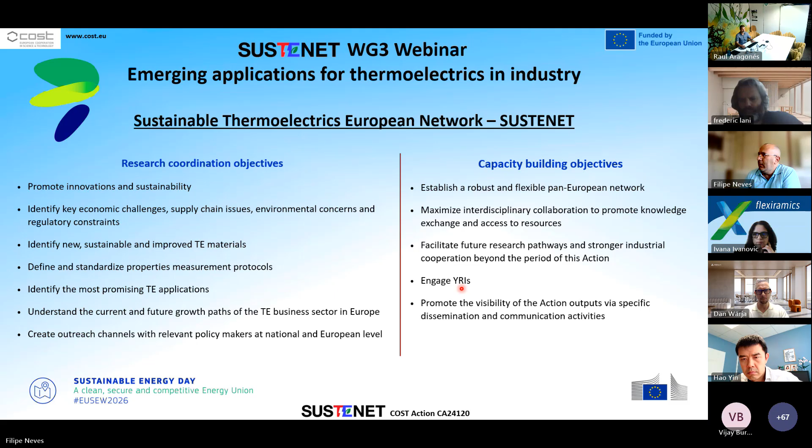So the SUSTENET action is organized in 4 working groups. One more dedicated to research of more sustainable thermoelectric materials, which is working group 1, titled Scaling Sustainability Through Artificial Intelligence. Then working group 2 is dedicated to application and use cases. Working group 3 to business development and supply chain. And finally we have a working group dedicated to dissemination, communication, and training activities.

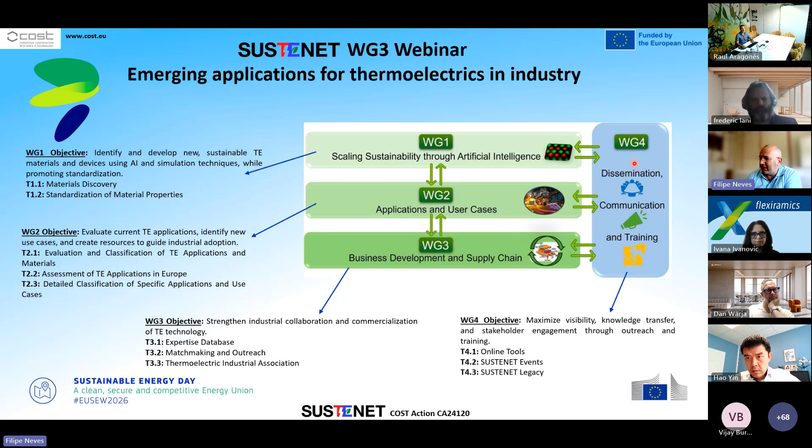So if you are interested to join, if you haven't done that yet, you can join by clicking through this link. You will have access to this web page, and then just click apply to join the working group that you seem most interested to work within. You can follow our activities on the website of SUSTENET and also through the LinkedIn page.

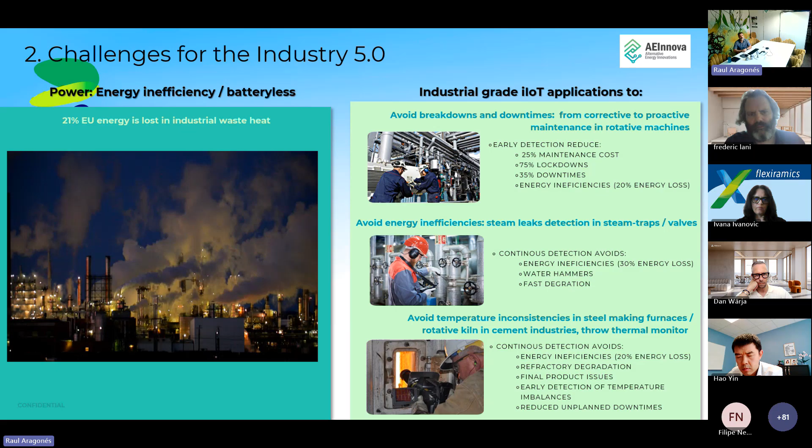When these companies look for industrial devices, on one hand they find those that are wired, with big challenges due to the cost of wiring. This only makes sense commonly in really critical assets.

But when they want to monitor non-critical assets like auxiliary pumps, mixers, ventilators, they commonly try to move to wireless devices because they need less investment in infrastructure for moving data around the plant. But they have a big bottleneck due to dependence on the lithium battery. Commonly, industrial sensors are powered by non-rechargeable lithium batteries. This is the main business of our competitors, because they want to keep you with recurrent expenses, recurrent OPEX, just replacing the battery every few years.

This is a very good business for them, but it's bad business for the environment, because every day they are moving to containers millions and millions of useless lithium batteries that have a very bad environmental impact from the harvesting of raw materials - lithium, from the lithium triangle.

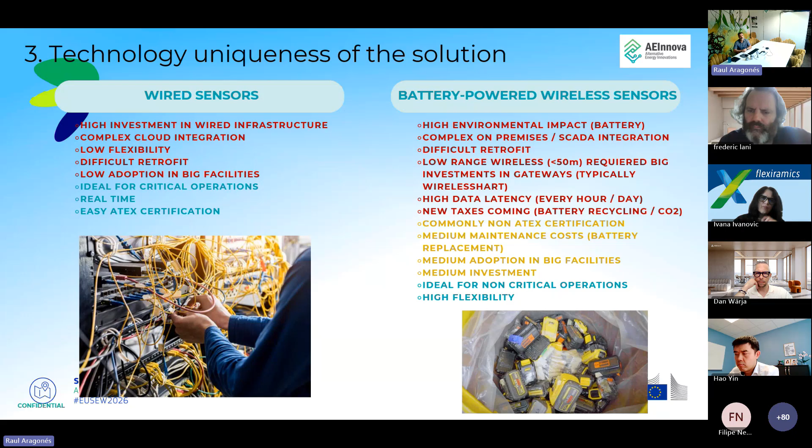So the solution is battery-less, taking benefit of the heat of the process. Easy, better integration, better long-lasting. Again, we have a continuous energy source, so you can send data very far. This, again, is a very important bottleneck from traditional wireless sensors.

Today, we have spoken with several customers commonly using wireless HART protocol that has only a few meters of communication distance, and they need to invest hundreds of thousands of euros to have a correct network of repeaters inside a big facility. Hundreds of repeaters that cost 2,000 to 3,000 euros each. Whereas with long-range wireless like LoRaWAN protocol, an open protocol, with just one gateway costing 1,000 euros, you could cover the full facility. So this is really a challenging innovation, thanks to using battery-less power sensors.

Also, they are more flexible. Lithium battery is explosive, so there is a lack of sensor portfolio because lithium is explosive, and commonly you cannot install this type of sensor in oil and gas refineries, chemical plants, or the food industry, since just the presence of dust can be explosive. You cannot use this in soybean manufacturing plants either. So these are big bottlenecks due to explosive areas.

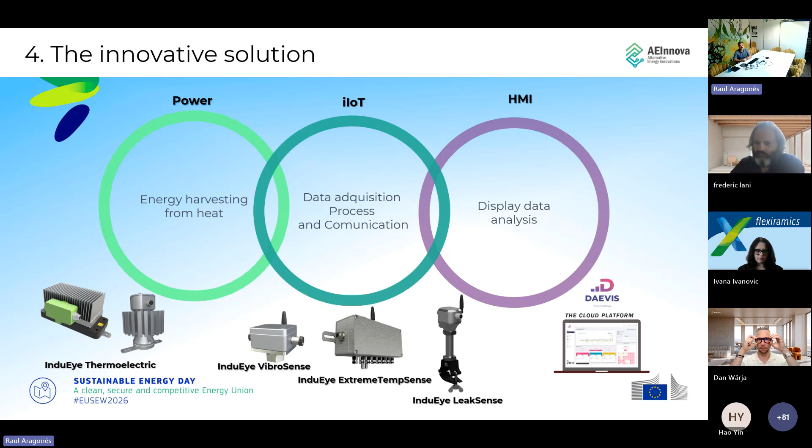Thermoelectric - so with just heat, we can generate clean energy that can be injected into my network of sensors, up to 300 degrees Celsius that this thermoelectric supports. The right one is the bigger unit that has more energy to power up to 3 sensors at the same time. The left one, the thermoelectric that can power just one sensor.

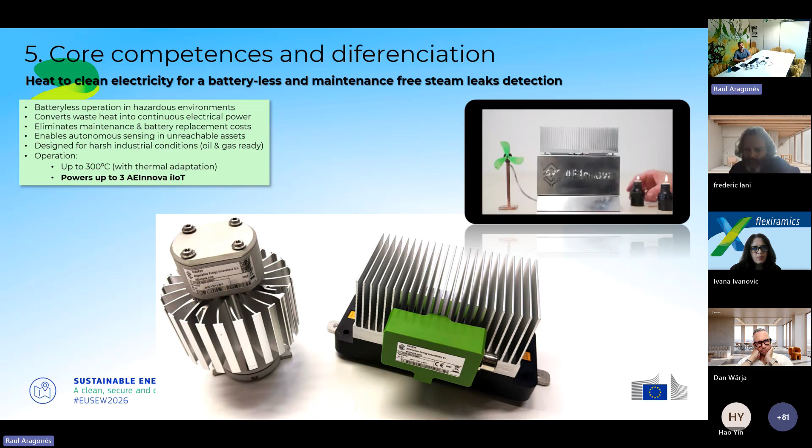And also these devices could power any third-party vibration sensors from our competitors. So, for example, IFM, Endress, Emerson - they could power their wireless sensors using our thermoelectrics.

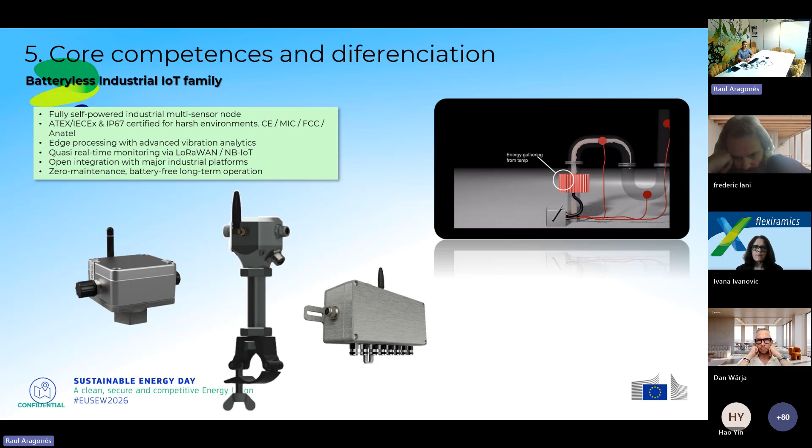Then the family of industrial IoT devices covers three main applications: vibration, leak detection, and high temperatures. Initially with LoRaWAN, a free long-range network communication protocol, but also narrowband IoT, a protocol that incorporates a SIM card and doesn't need any type of wireless infrastructure, just uses the 3G/4G network. So, 3 main applications.

This one is for vibration monitoring - one heat-powered unit that can generate energy for up to 3 vibration sensors, 3-axis vibration sensors, with 6 kilohertz of bandwidth to have a full diagnostic of potential machine malfunction - vibration failure that generates data from cavitation, lack of lubrication, unbalancing. So any type of potential malfunction can be detected.

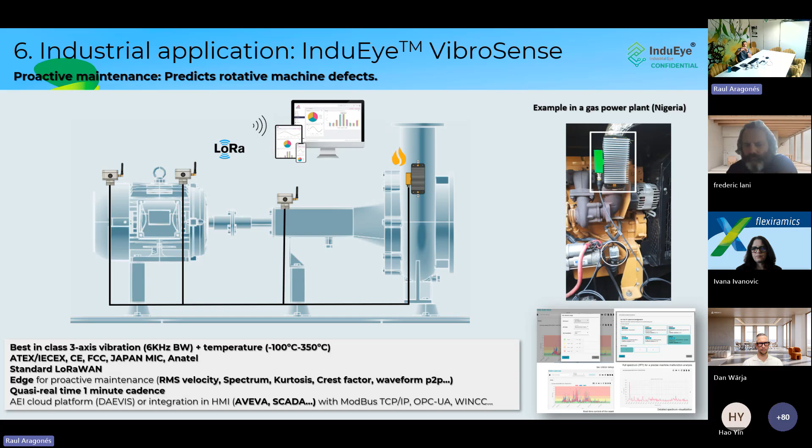On the right, a gas power plant area where we are monitoring vibrations in these engines, and below, what our customers see in our cloud platform, where they can identify the level of criticality - green, yellow, and red - to know the danger level of the machine. And on the right, you just apply the window of the spectrum, and you can identify where the energy is located, identifying the origin of the malfunction of this equipment.

Second, which is the main introduction of this webinar, is about steam leak detection.

It's a way of doing steam processes more energy efficient and letting companies save millions of euros per year in steam leakages, because a steam trap is a device that detects water condensate in the steam pipelines and evacuates this water condensate to the boiler. If this water travels around kilometers of pipeline, it can create water hammers that can make the steam pipeline explode.

This is why they need to evacuate this water condensate, and the equipment is called a steam trap. So this device set over the steam trap is able to detect, by temperature comparison in the inlet and outlet of the steam trap, but also by listening to the acoustics, the sound of the steam trap, what is happening inside the steam processes. This is the first generation, first tested in 2021, combining thermoelectrics plus IoT in the same device.

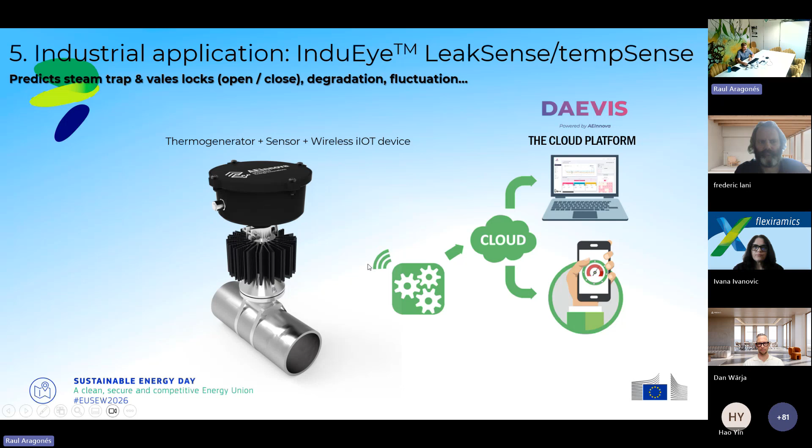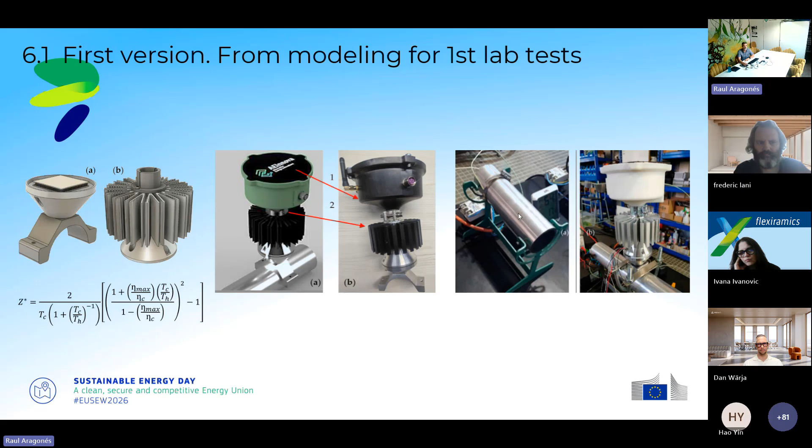First modeling to obtain the performance of this energy harvester, first modules, first tests in the laboratory, and first tests in our thermoelectric generator laboratory. Then testing in one oil refinery plant on the left, and on the right, in one big stakeholder in pharma.

This is the LoRaWAN gateway from our partner Kerling that has 2 kilometers of radius of communication and up to 10,000 sensors connected at the same time with just one gateway. And this is the equipment that monitors 2 temperatures, inlet and outlet, and also listens to the steam trap.

The same approach here. This is a buoy steam trap, and this is a thermodynamic steam trap. So inlet and outlet temperature, and this microphone, an ultrasonic microphone, that listens inside the steam trap.

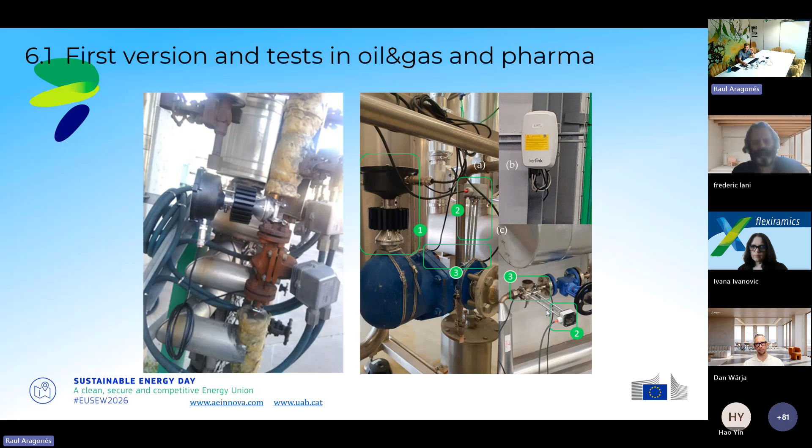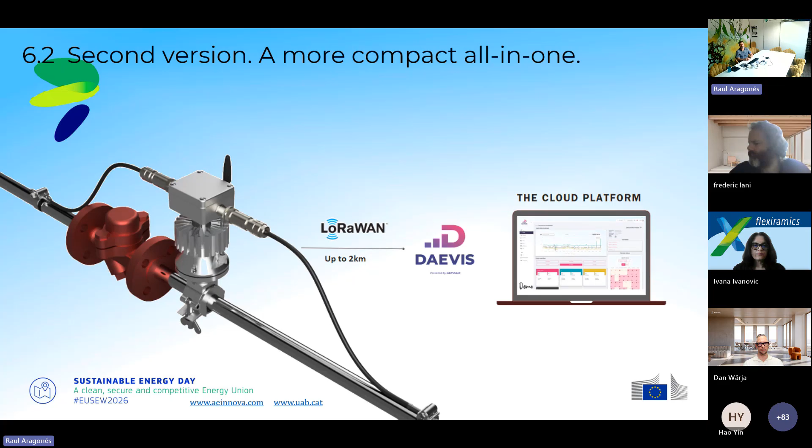And then the equipment evolved to a new generation that was more compact. Again, 2 temperatures and ultrasound. This was from 2022 to 2024. So a more compact device: we reduced more than 70% of the overall size of the thermoelectric, and also the overall size of the IoT device. Again, monitoring 2 temperatures, inlet and outlet, and ultrasound.

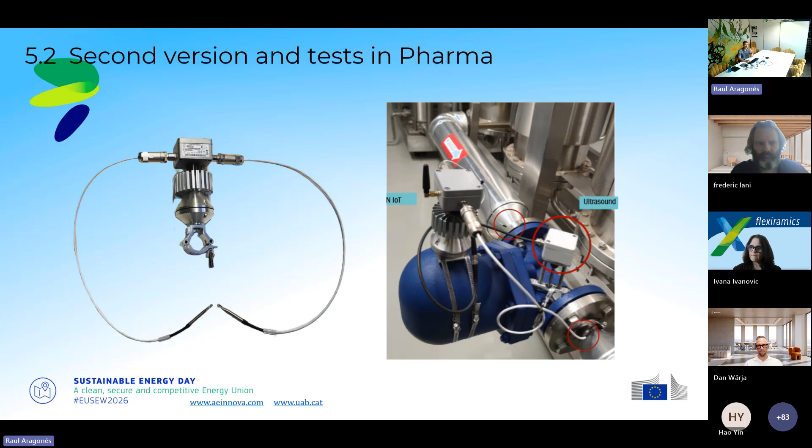This equipment was not really industrialized at scale, which is why we moved to the last version, which is commercial right now, and we have first projects running in Latin America, and also next month in the Middle East. So this is the equipment: thermoelectric on one side, because sometimes the energy source is not near the steam trap, and the ultrasonic and temperature detector, the steam leak detection, that you locate over the steam process.

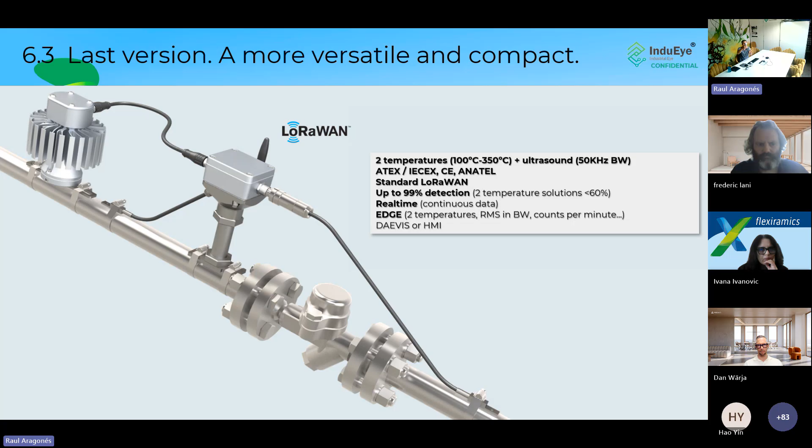And this is an example of one of our customers, in this case Petrobras in Brazil, the biggest Latin American oil company. We just set the thermoelectric in the steam pipeline. We set the system to detect, in this case, temperatures. This equipment is called TempSense.

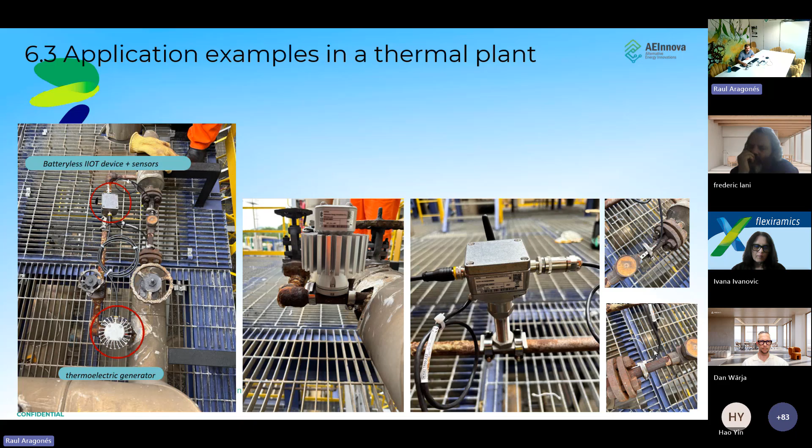We're launching next month the device LeakSense, which also incorporates ultrasound at the inlet and the outlet of the steam trap. We monitor temperatures and determine when the equipment is losing steam. But there's also a food industry application of the steam trap, where we're also testing and detecting ultrasounds plus temperatures.

This one is called Colacao, from Idilia Foods. It makes cocoa chocolate powder. So we detect temperatures and ultrasounds.

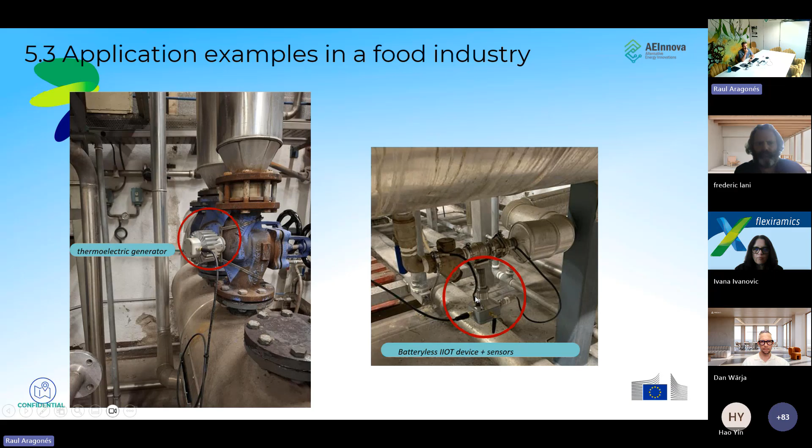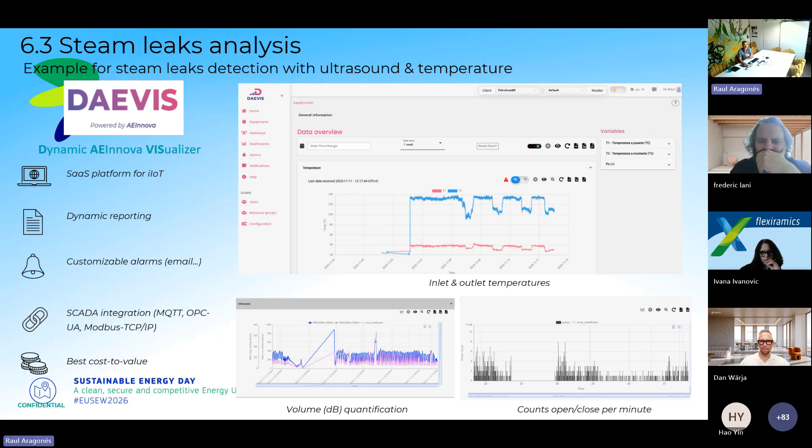These are validations done previously to installing at Petrobras. What our customer sees is inlet and outlet temperature that allow us to detect when we are accumulating steam water in the inner part of the steam trap. Also ultrasounds that detect the level of sound inside the steam trap and the counts per minute that the steam trap opens and closes, indicating that the device is working properly.

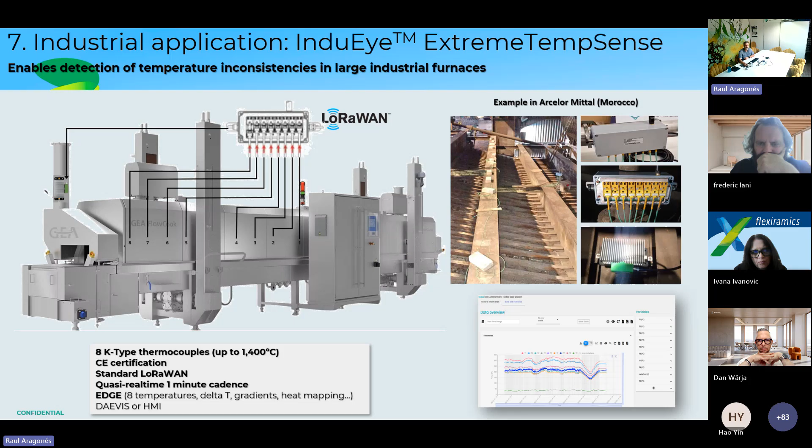Last but not least, an equipment to monitor temperatures in big furnaces to determine gradients in temperature. This is an example of one customer in Morocco, ArcelorMittal. We detect different gradients of temperature using this equipment, which has 8 thermocouples.

In general, we are addressing a big challenge across all industries: food, oil and gas, chemical, iron and steel, pharma, paper, cement and concrete, and petrochemical.

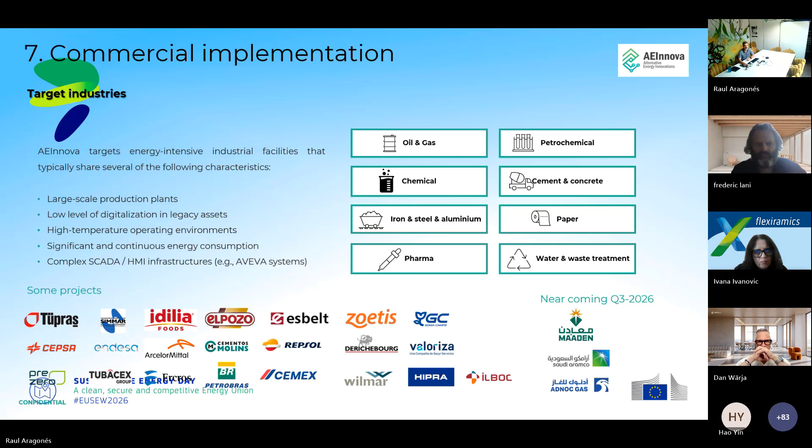We produce the devices up to 200 units per month here at AEInnova. We have all the machines to produce all the devices, and we also have a subcontractor here in Barcelona where we can produce up to 2,000 devices per month.

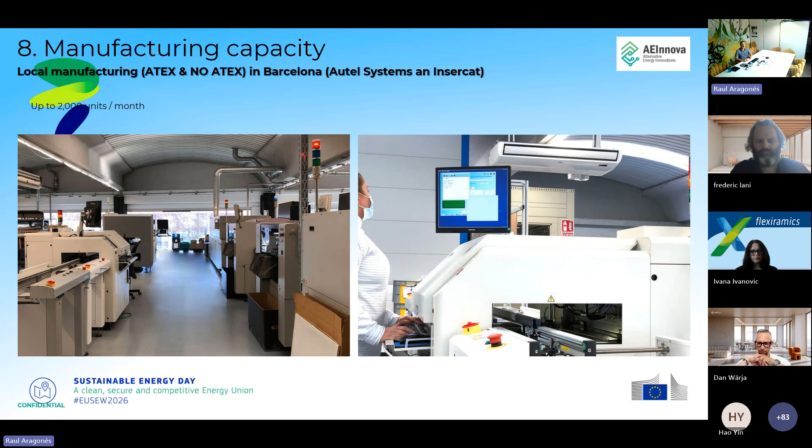So in general, we're ready to export to all the continents. This is technology where we have the know-how here in Europe, and from Europe to the world. We have several patents in Canada, the US, and Europe, the ATEX and IECEx certifications globally for explosion processes, and several compliances to sell technology in markets like Japan, Europe, America, and coming now Anatel in the next weeks for

Latin America, for Brazil. And this is my contact.

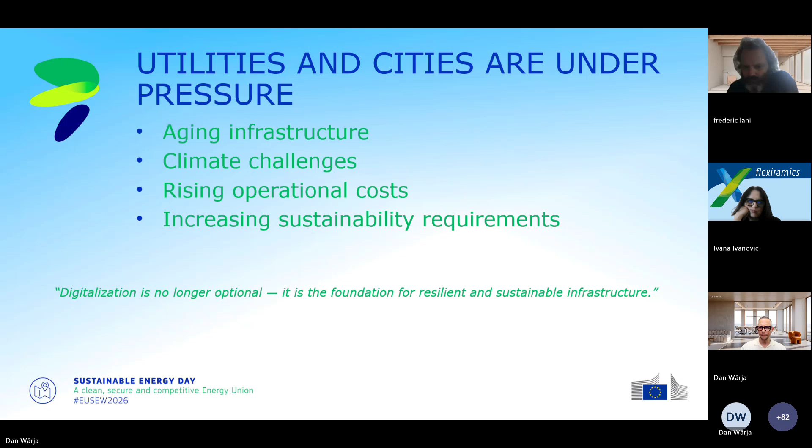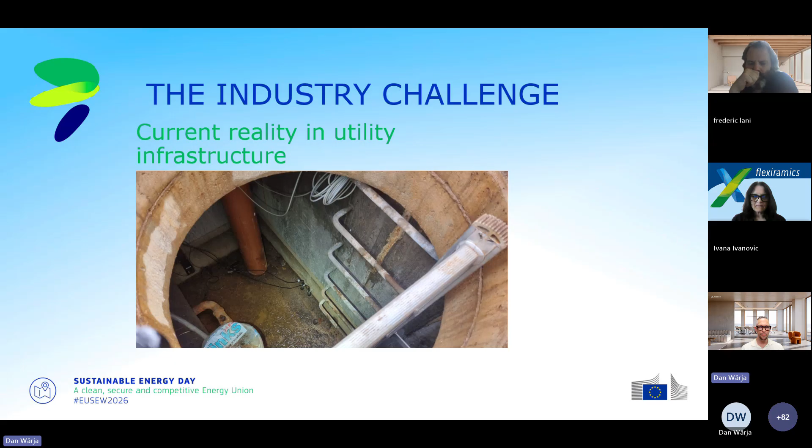What we have seen today is that there are about 700,000 of these manhole chambers still in use in Europe. 700,000. So just imagine if we don't take care of them, we have a big problem in the infrastructure.

This picture is a good example. It might look like a very nice, cool picture from a remote distance. This is actually boiling green district heating water where the pipe could burst in such a network, or in the manhole. It's still a nice picture from a distance, but don't be showering in that water, because that might be your last shower in your life.

The challenge again: we know that heavy rain will affect the system with flooding. There could be leakages, there are leakages in the system as well. And as mentioned before, working conditions must be secured, because you don't shower like that more than once. That's a simple fact. And of course, we would like to boil only the water that needs to be boiled, otherwise we simply waste energy resources. So let's keep the system as tight as possible.

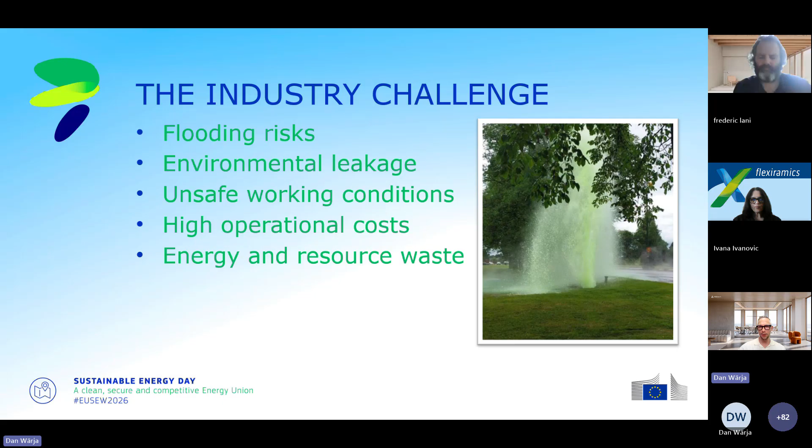On a bigger picture, we have this green transition, decarbonization, that we all speak about, and that simply requires better operational intelligence. We need to know what is underneath our feet. Sustainability is the key - we need to know what is underneath our feet to achieve the best sustainability.

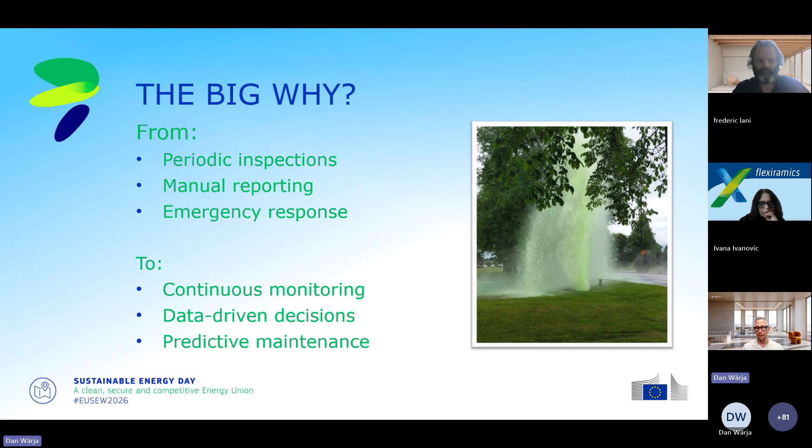So the big why - how do operators work today? It's a lot of reactive maintenance. Once you see something leaking, you solve it, of course. The customers, the utilities, try to be one step ahead, so they do a lot of manual inspections, if they ever have the time for it. But in general, there's a lot of reactive maintenance. That's the situation we would like to change - we all need to reach a level of continuous monitoring, and be ahead of disasters with predictive maintenance. All that is based on data-driven decisions, so we need to get data from the system.

This is now where we actually step by step get closer to the Thermoelectric technology.

It's not about keeping these chambers forever, but utilities need some sort of information on what they should prioritize - what chamber should be removed next, over the next year. And this isn't done in a day, a year, or even a decade - this will take decades to fix.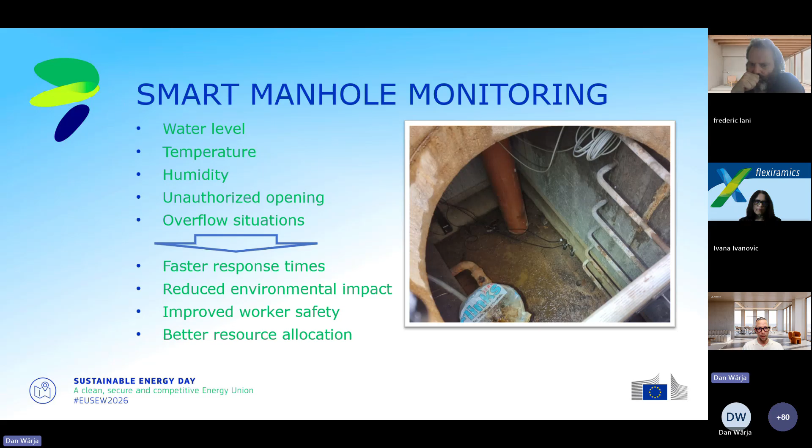So by having this fast response time, by having an industrial IoT device inside the chamber, we can first of all increase worker safety. We will use our resources in a great way, and in the end, create a better environment. Simple as that.

So thank you, Hao, from technology and your team, for helping us with this energy harvester that we call the WEHM1. It's an energy harvester utilizing the delta T, in our case of 30 degrees - that's what we say should be the minimum. We can go lower than that, but with a 30 degree delta T, as Raul presented in his earlier presentation, we can have sensors installed out there. In our case we installed them in manholes, and these sensors communicate by 4G or NB-IoT. We have real-time communication, we get the data to the cloud, we can have clever, great alarm management, and we can also see trend analysis. By having the trend in our hands in the data, we can make clever decisions.

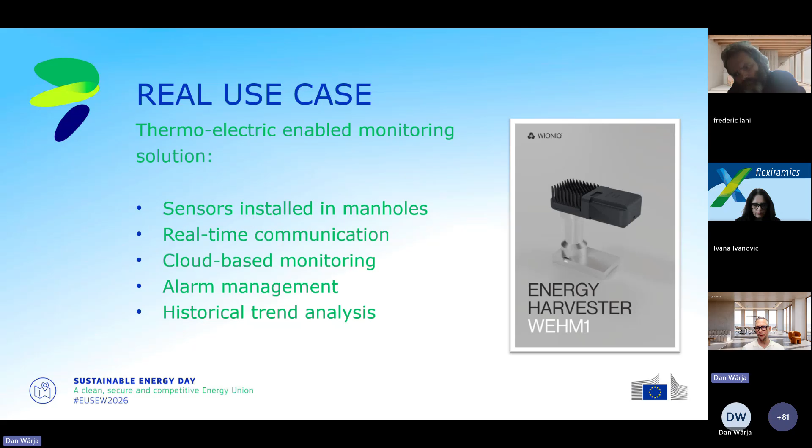Some very fresh examples, one from Austria, one from Sweden. It typically looks like this - we have pipes that aren't that corroded in the end, but we have the harvester installed on the hot surface, what we call the flow pipe. We secure that we have 30 degrees from the flow pipe - normally you have 95, even more degrees on the flow pipe. The chamber typically has about 25 degrees, so we always have a good delta T of minimum 30 degrees. That will serve our sensor, in this case, this manhole application, where we add all the sensors that can support us with level, temperature, moisture, etc.

So in the end, we have three main benefits. Operationally, we will reduce emergency callouts, and be ahead of the disaster. It will help the utility and the customer prioritize which chamber is the most affected one, what should be prioritized for the next year. Maintenance planning, of course, is the final output of that.

Environmentally, we are the leak busters in this industry. By pinpointing where we have the leak in the chamber, we can catch it at an early stage. You don't need to manually inspect these chambers, running around or traveling with a car, opening lid by lid to see dry or wet. Well, we need to do something about that.

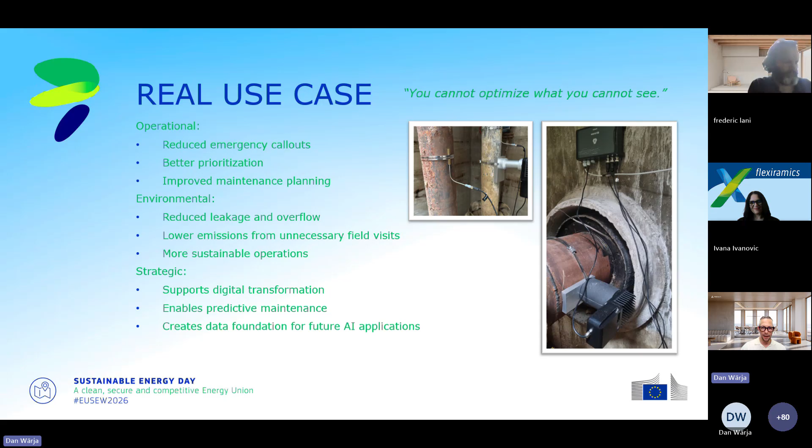And that's the strategic final point as well: predictive maintenance. So collect data for clever decisions, and we can promote this digital transformation to get real digital twins in the smart cities. You cannot optimize what you cannot see. So we are actually the eyes down there underneath your feet, the lid that you can find in the street.

Business case, as Hao mentioned as well, this is a kind of free of charge energy that we see. It's the waste heat. Instead of using lithium-ion batteries - first of all, they're classified as dangerous goods. It's dangerous, so just the transport nowadays is not free at all to transport lithium-ion batteries. That's one cost you need to remember.

The manholes are typically positioned in the street. If you should open a lid, you need to stop the traffic. It's a big effect on society. Security-wise, you should have 2 people, and they have for sure some sort of hourly cost - of course different all over Europe, but there is a cost, and you can easily plan 2 hours of breakdown. Since it's a dangerous area, you need some sort of emergency evacuation tools or safety equipment, simply spoken.

Batteries don't last forever. In our case, typically 3 to 5 years, and then you have to dispose of them somewhere, so the environmental impact is there. Just seeing a typical usage of 10 years, up to 3 cycles of this step-by-step is a must - you install them, you replace them the first time, you replace them the second time. So just imagine that all these costs together are far higher than the cost of installing the harvester.

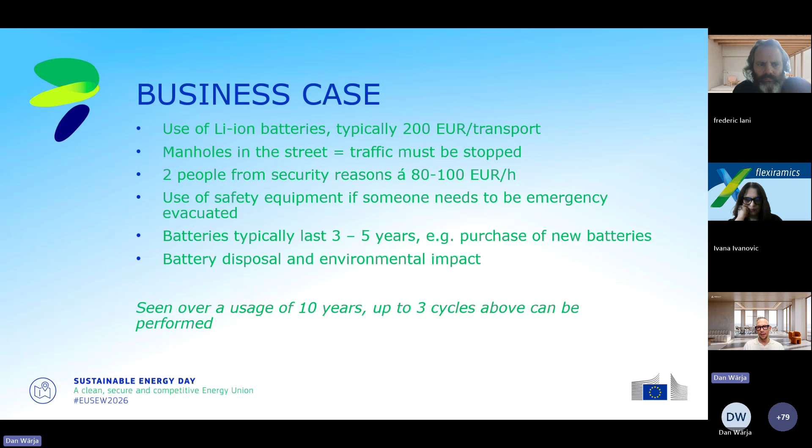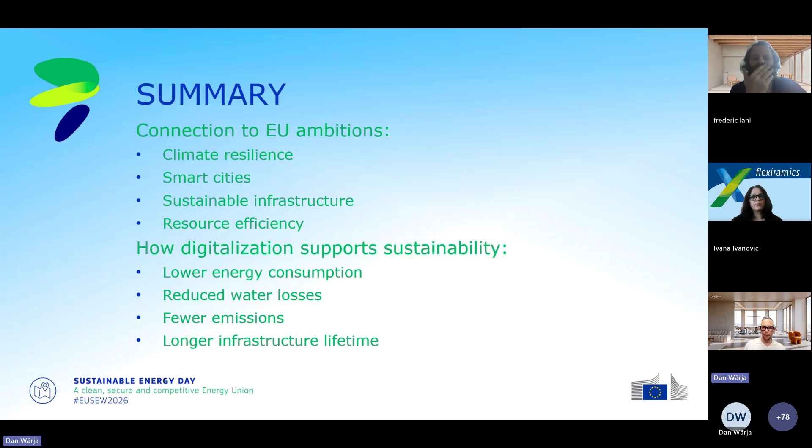Focus on what is important, that's the part. So a final quote from Wionic and me, Dan Wärja: the green transition is not only about producing energy differently, it's about operating infrastructure smarter. So thank you everyone for listening to my contribution, and we are open to collect all the questions in the seminar by the end. Thank you very much.

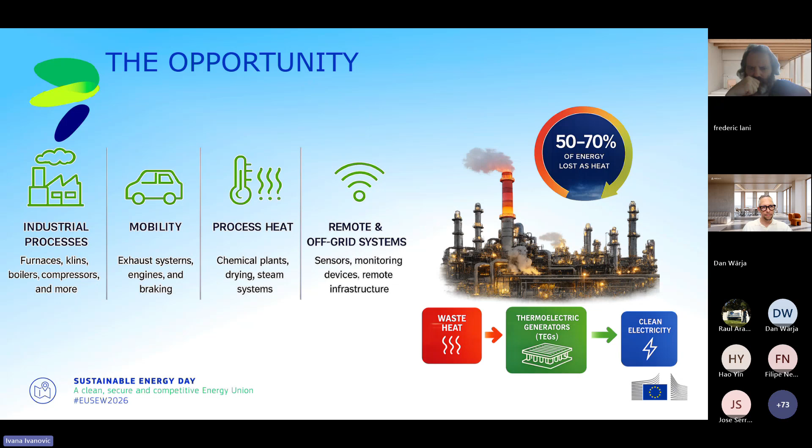So, should we move? Previous participants explained how much of the energy today is processed but also lost as heat, no matter the different industries mentioned here, and the pressure they are under to recover at least part of that waste heat, where thermoelectric generators come into place as an option to convert part of this wasted energy into electricity. For that, they should be reliable. I'll use some of the schematics, so hopefully, at least as a scheme, it is correct.

The TEGs operate under extreme conditions - steep temperature gradients, chemical exposure - and there is a problem of reduced efficiency and reliability, especially with the material interfaces as they degrade over time. So this is often, very often, the limiting cause of material interface degradation.

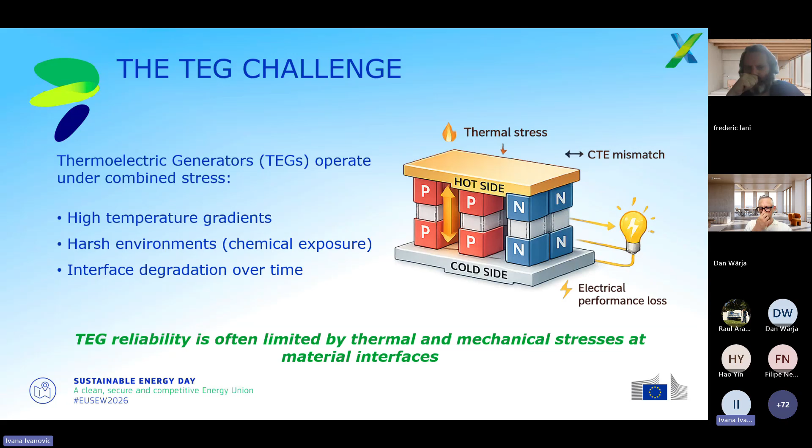What do we do? Flexiramics makes pure ceramic microfiber non-woven material. I also have a short film to show how it looks. Basically, it looks like a Kleenex tissue paper, but made of ceramics. So it has ceramic performance, but also polymer-like flexibility, and that is something unique. Of course, as ceramics, it has high temperature stability, and it's still lightweighted, so it's easy to process.

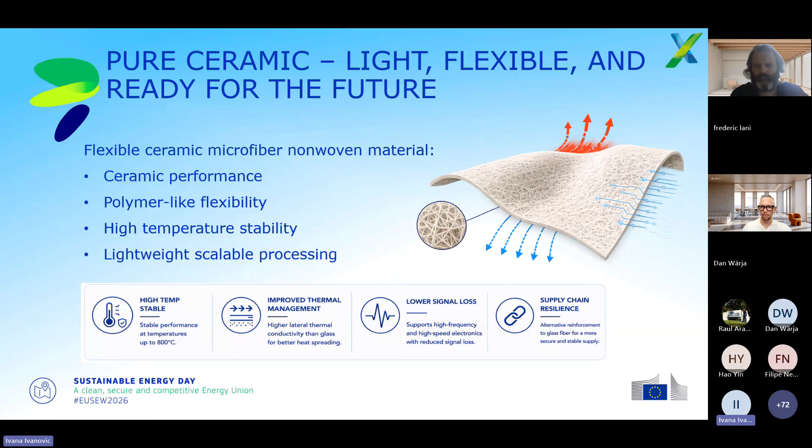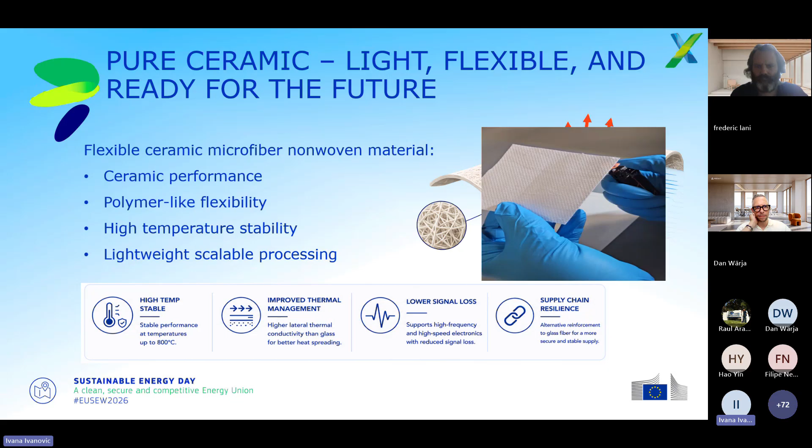This combination makes it interesting for different applications, one of which is new architectures in thermoelectric generators. I think this is simple, how it looks. So this is ceramics - it doesn't burn, it's flexible, it's very thin and lightweighted. That is what we make.

If you think about the technology, it's a sol-gel, the proprietary technology we have. It goes through different temperature gradients and then comes out as a continuous non-woven fiber from the oven. This product is then further treated or converted into composites, coatings, impregnated structures that give versatile options for applications.

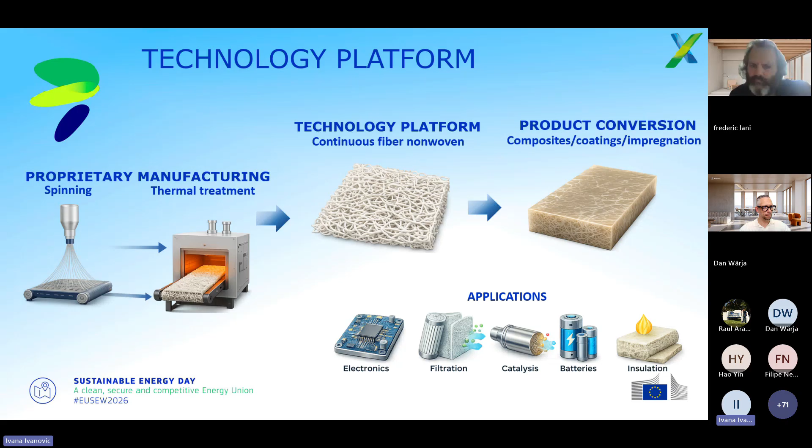And when we talk about electronics, energy, you see applications in electronics, catalysis, batteries, also in insulation, electrical, and even such as material in filtration.

So what makes our material powerful or interesting, talking about new or advanced materials, is that one material platform actually addresses multiple engineering challenges. We can talk about lower thermal expansion, which gives dimensional stability, so the CTE is close to copper. We can talk about faster heat dissipation, especially in the lateral XY direction compared to the commonly used glass cloth - it has 4 times better thermal conductivity.

It shows 70% less signal loss when used compared to the mentioned glass cloth, in 6G or other systems. Last but not least, it has more efficient energy recovery or waste heat recovery. So that is where we find a place also in the new architectures of thermoelectric generators.

Oops, sorry, wrong button. I wanted to move the slide, so I pressed stop sharing. So, back on.

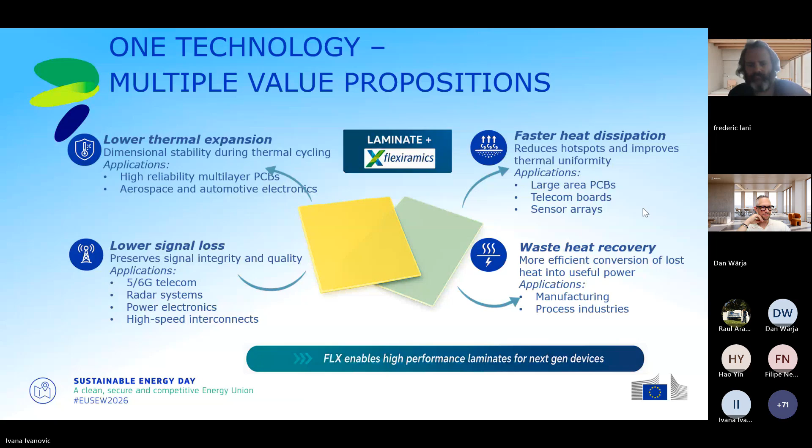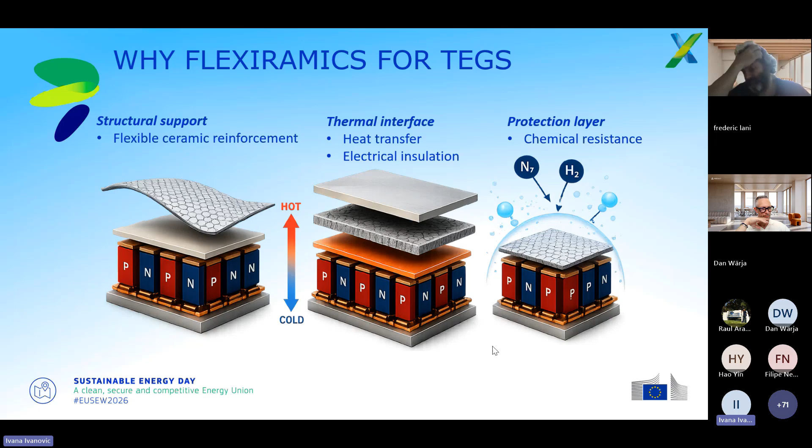So why our material, Flexiramics material, for thermoelectric generators? It has multiple functions. It can be used as a reinforcement layer. It does provide structural support. It improves the thermal interface and offers electrical insulation. Last but not least, it can be used with different protective layers for chemical resistance.

The value proposition, when we talk about flexible ceramics that Flexiramics makes for thermoelectric generators, would be in CTE matching, which provides better reliability. It has, when in a composite as we make it for this application, a slightly conformable interface contact, which reduces the contact resistance. And coming to the lightweighted aspect, it is very thin - 60 micron, 80 micron - so it's not compromising, it still has structural integrity, but offers better design freedom or lightweighted options.

So that is exactly like the small TEG prototype that Hao was holding at the start. That is the base, or reinforced film, which can potentially be integrated into TEG.

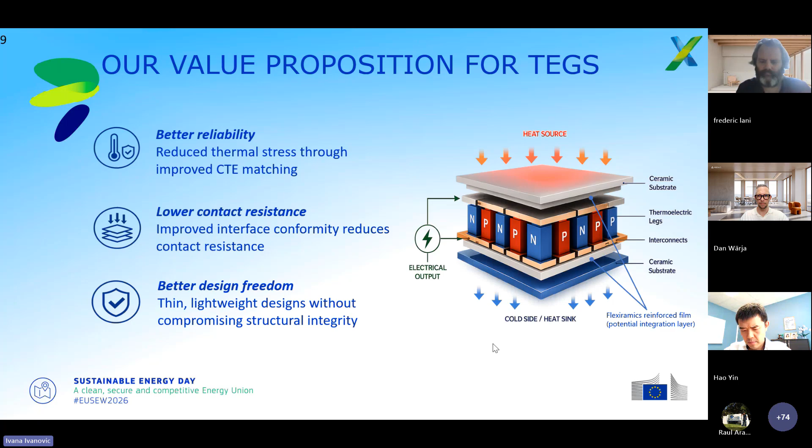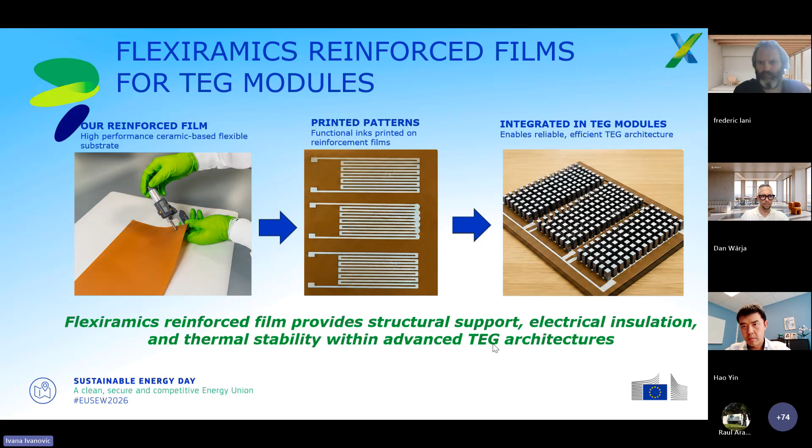And just shortly about part of the sustainability - as already mentioned, more efficient conversion of heat, longer lasting materials because durability, efficiency and reliability will be longer. It has lightweighted use, so also low material use, and shows or gives potential for reuse and different making of the materials that are currently used.

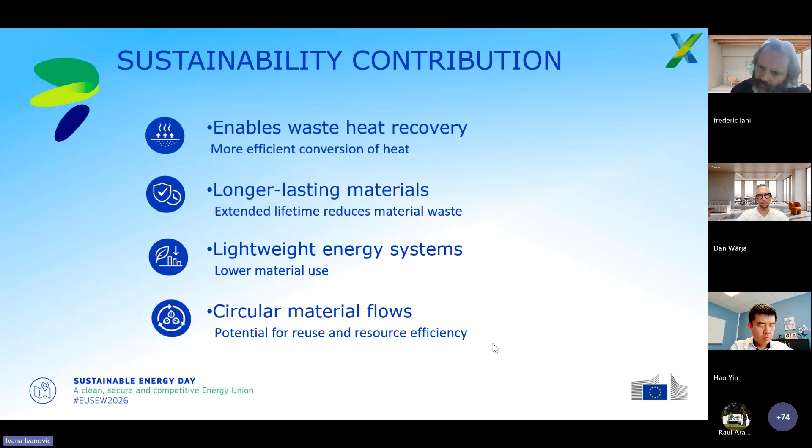What we do with the cluster - we're very excited to be part of the cluster and that regional ecosystem that focuses on sustainable innovation. What we can offer is advanced materials, strong material science and scalability. We also have pilot scale capability here in the Netherlands, where we manufacture the material, and we welcome collaboration with partners on material integration, testing or prototyping.

So with that, I just wanted to thank you for your attention, and if you would like to explore any projects or technical discussions or questions, you can freely contact us through the info shown on the screen. So thank you very much.

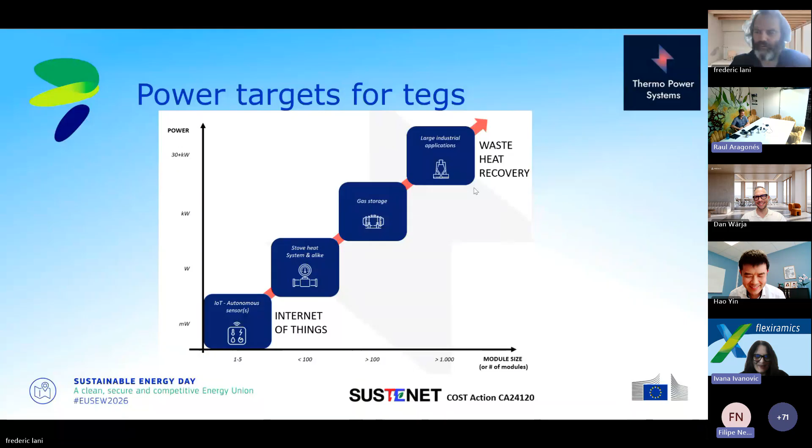I think we missed Frederic. Let me see if he can join again. This is a problem with the laptop not being batteryless - it depends on the battery. Let me wait a couple of minutes, there's a problem with the connection.

Probably we can move to some of the questions that are already in the chat. Yes, we could - if you'd like to ask any questions to the first speakers, you could write in the chat. There's one from Johannes. I don't know if you want to...

How high is the thermal conductivity of the flexible ceramics? That's probably for me. We speak about XY, so lateral, and then in PI, polymer, compared to the conventional glass used, it's 4 times higher, so 2 to 2.2 watt meter Kelvin. We don't compare the Z direction - I saw the table in the chat, but I'm not sure if it's X, Y, or Z. We talk here about the lateral direction, which improves heat dissipation and hotspots, and that's 4 times higher than glass - I said 2 to 2.2.

Thanks, Ivana. I just want to supplement - it's not only the thermal conductivity, it's also thickness, which plays a very important role. Correct, and it's flexible - most importantly, it's flexible. We love flexibility.

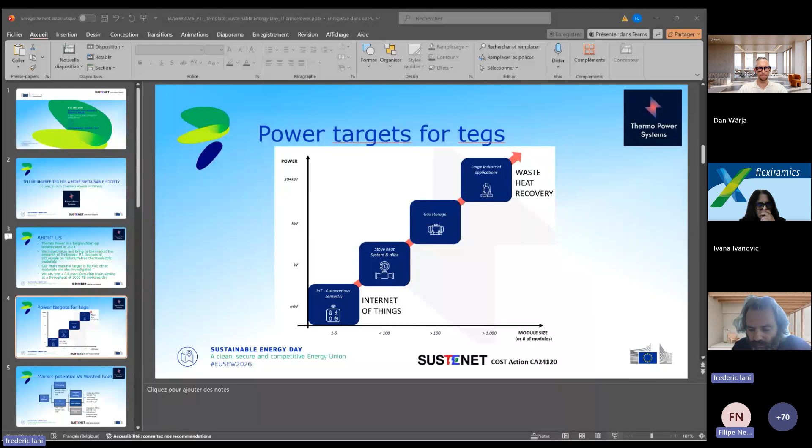Sorry Frederic, the slides are not moving. No, do you see it now? I just went out of it. Yes, let me continue like this. So you saw the slide on the market when I said market share. Maybe not. No, doesn't matter.

So why iron, vanadium, aluminum? First, these are very abundant metals, but also vanadium can be available as a pure metal, though usually we buy it pre-alloyed with iron because it's available as an intrant in iron metallurgy. So in Europe, vanadium is also readily available when pre-alloyed with iron. We have no problem sourcing the materials - it's a reliable supply chain. As we said earlier, if you take tellurium, that's a problem - it's manufactured mainly in China, maybe also in other countries, but it's a limited quantity and a vulnerable supply chain. This material can also be processed through conventional and powder metallurgy.

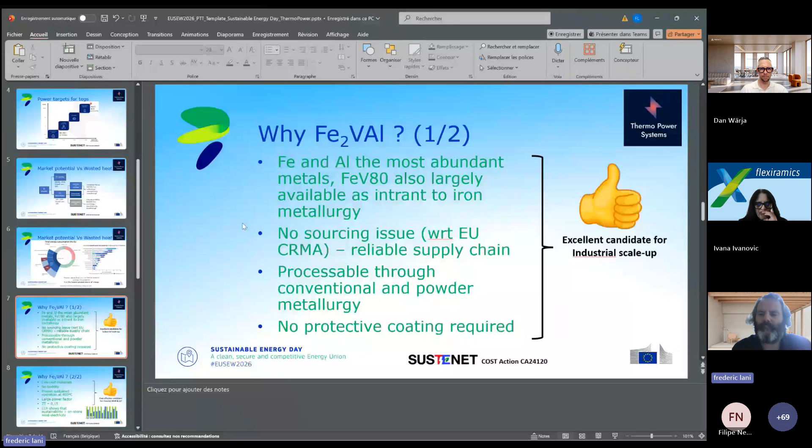If you think about thermoelectric modules, this material naturally passivates, so it's naturally protected against corrosion and oxidation. Also, we don't need protective barriers against diffusion when we assemble it. This is another advantage - an excellent candidate for industrial scale-up. That's one of our main advantages of the material.

Now, of course, what goes along with this is it's a low-cost material. It's much cheaper - let's say 50 to 100 times cheaper.

It has no toxicity when we have... do you still hear me? Yes, okay, because I hear some strange noise from Teams, like if I lost you.

It can be operated up to 400 degrees C. It has a large power factor, actually very competitive. Its major drawback, I would say, is that the efficiency itself, often measured in terms of ZT for thermoelectric materials, is 0.15. So it's a low efficiency, which means we will have a low conversion efficiency.

But another advantage is that we have performed life cycle analysis of this material for certain applications, and we could show that it's actually very competitive and has a big advantage. It's very positive in terms of the different indicators of the life cycle analysis against renewable sources of energy like wind electricity, and the same against photovoltaic panels. So this thermoelectric-based electricity will be cheap and very interesting and sustainable compared with other renewable energy sources.

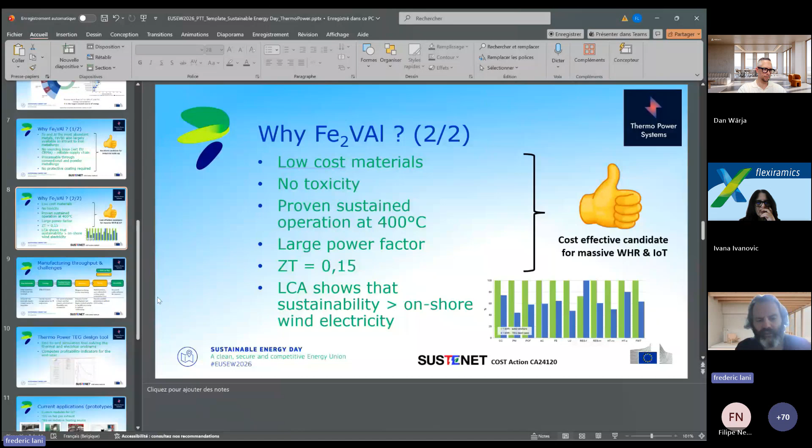So where are we, what are we doing now at ThermoPower? We started with the material, we improved the performance of the material up to ZT 0.15. And as I said, one of the main challenges is to be able to manufacture it up to 1,000 modules per day.

So what I'm going to show here is basically the manufacturing chain, and I'm going to say what are the main advantages and the challenges - advantages against challenges. You see here there's a color code. When it's green, it means we already achieved more than 1,000 modules per day - the throughput we're observing is above 1,000 modules per day. When it's orange, it means we are between 100 and 1,000 modules per day, so we still have challenges.

So now if we start from raw materials, what is particular to our approach is the fact that we have to work with large quantities of industrial raw materials. If you look at research articles, or academic researchers, usually the quantities are very low and the modules are prepared from pure materials. We work from raw materials, meaning you have impurities and we have to compensate for that.

Then if we go to casting, we have revamped a vacuum induction melting oven which allows us to manufacture 20 kilograms of material per batch, which is a very good quantity regarding our objectives of throughput. But the point is that casting requires very accurate compensation, for instance, for evaporation of aluminum.

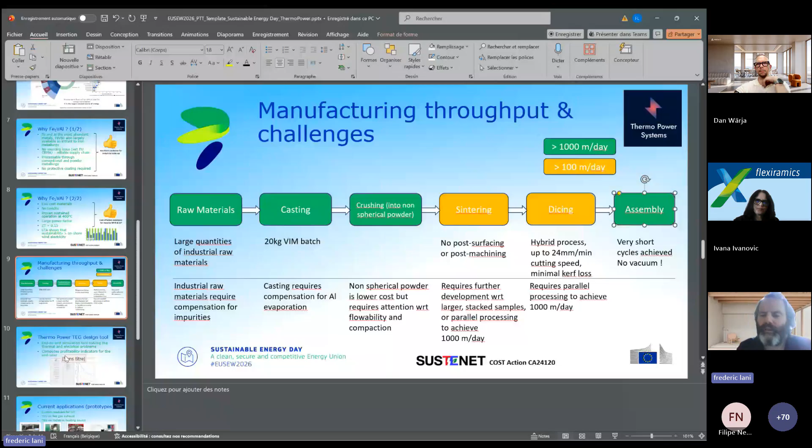So we have developed a number of tools and are working on different applications. We developed a design tool, which is really an end-to-end simulation tool that solves the thermal and electrical problems, computes the exchange coefficients, and can do parametric studies of complete systems. It also computes the profitability of waste heat recovery applications for the end user. In the end, you compute the cost per watt, the cost per watt-hour, the number of years before return on investment, and then the profitability from the benefit of having this cheap electricity. We can compute that, and then we are discussing with future customers.

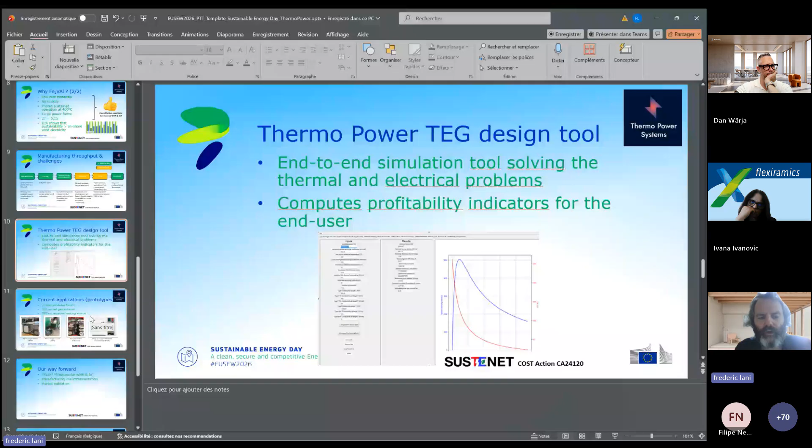So I will show you a couple of applications. We are only starting real-life in-situ applications with early adopters. What you will see here is mainly directed towards waste heat recovery. Some of the people here in the session are also working with us and will test very soon our modules for IoT.

We call this a thermoelectric battery. Maybe it's a bad wording, but it's how we call it. So we try to use as many standard elements as possible, the kind you could find in other waste heat recovery technology, to really minimize the cost.

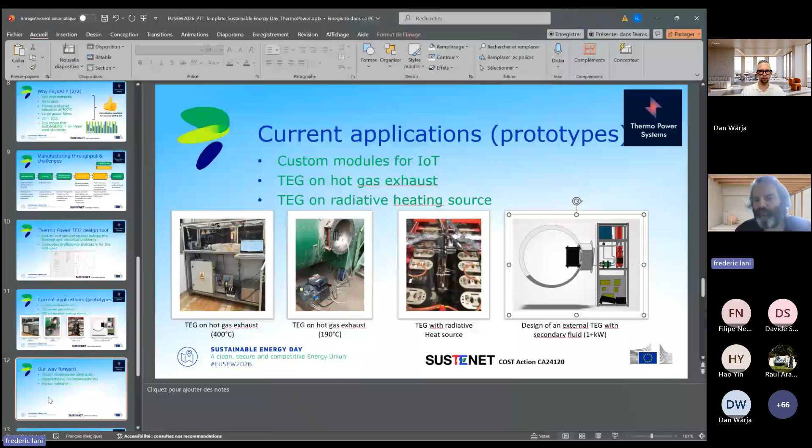And I think I'm done.